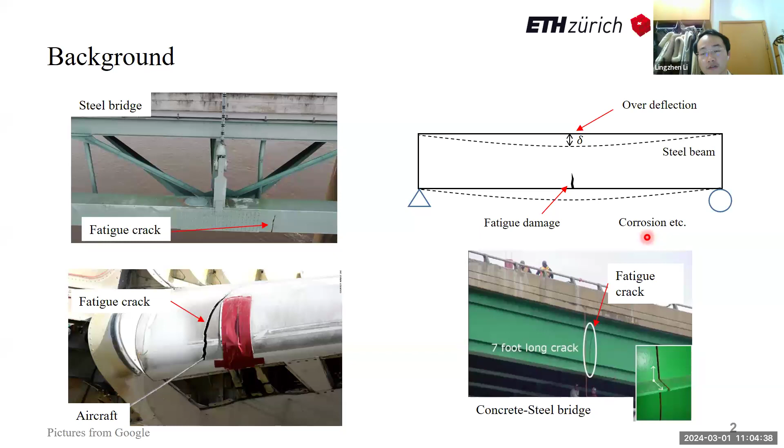The background of this PhD work is that metallic structures around the world, many of them are suffering from fatigue and fracture problems. Here are examples of civil structures, and here is another bridge. Not only in civil engineering, but also in the aviation field and associated fields, fatigue and fracture damage for metallic material is very common. Here is a schematic view of those typical damages. Fatigue damage, over-deflection, if combined with corrosion etc., the problems are even more severe.

What can we do with those problems? We have generally two sorts of solutions. The first is simply to replace the damaged structure member and put a new one there. The problem would be solved at the structure level and also the material level. However, such a solution has a very clear disadvantage. For example, for bridge structures, local traffic would be blocked, creating disadvantages for local society and economy.

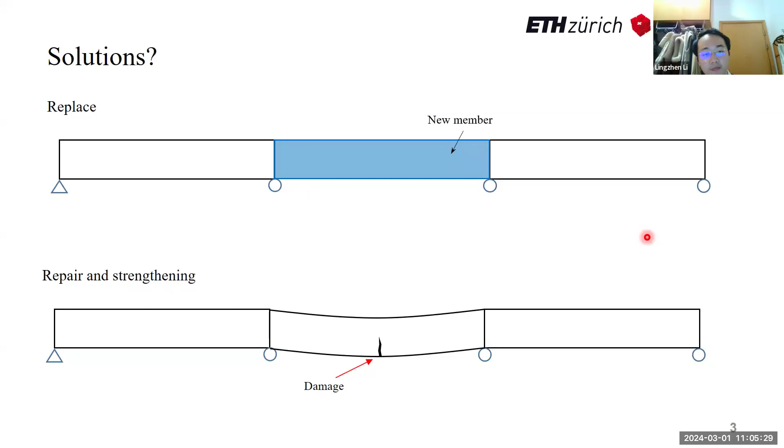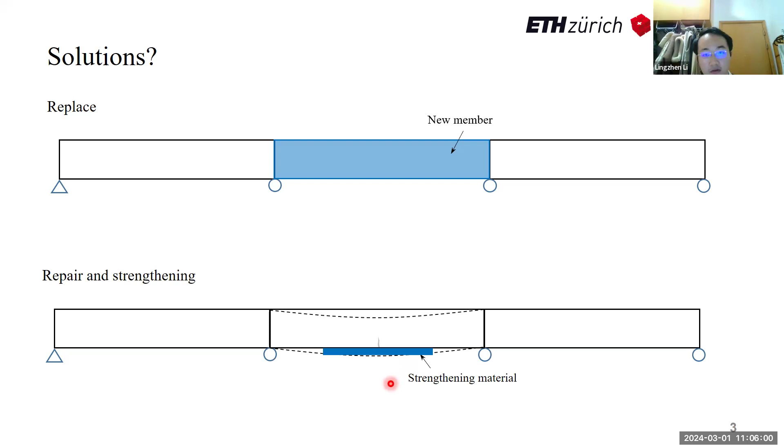Instead, we could leave the damaged structure member there, but do some strengthening or repair. The problem at the material level still exists, but at the structure level, we could solve the problem and make the structure runnable. There are a lot of techniques for structure repair and strengthening for not only steel structures, but also concrete structures, etc. In my PhD work, I used a material called iron-based shape memory alloy, for short Fe-SMA, for such bonded prestressed strengthening.

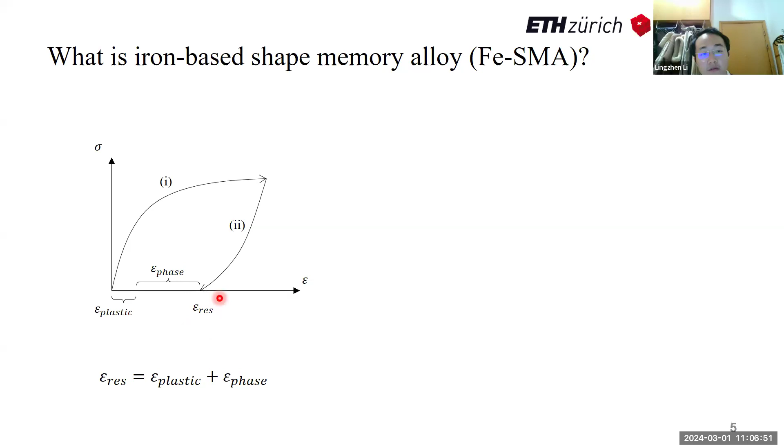First of all, what is this material? This figure shows a typical stress-strain behavior of iron-based shape memory alloy, Fe-SMA. After unloading, it features a typical residual strain, which comprises two terms. The first is a plastic strain. The second is a phase transformation strain. For traditional steel material like mild steel or high-strength steel, this is the end of the behavior. But for our shape memory alloy, this phase transformation strain can be fully recovered upon heating to a certain temperature. This phenomenon is called the shape memory effect, as if it remembers its original shape.

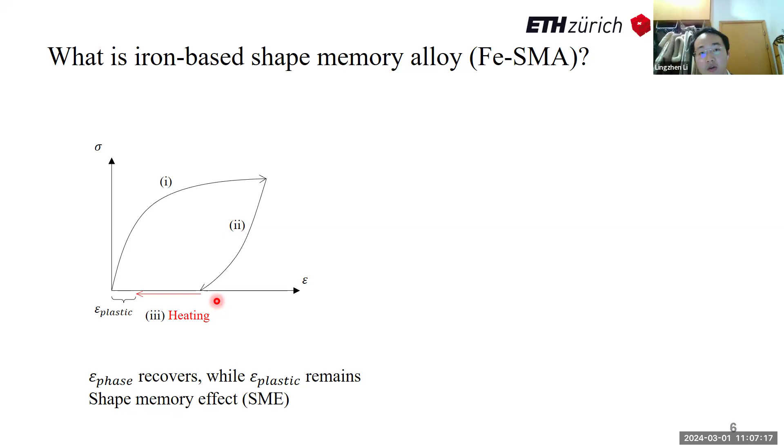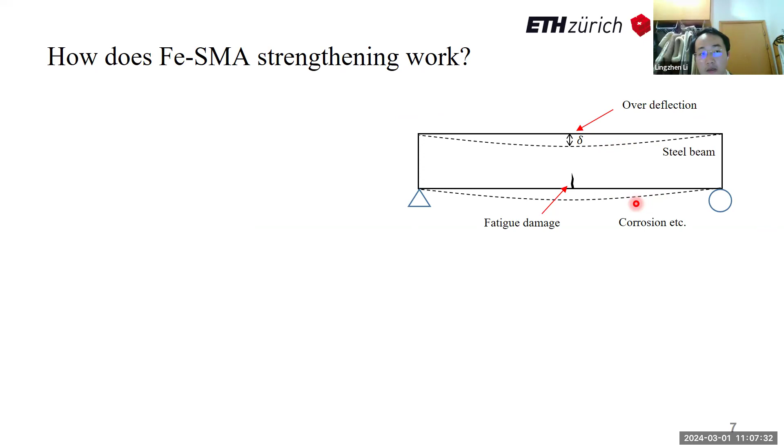We can use this special property of shrinking during heating for prestressed strengthening. Here is a schematic example. As we previously mentioned, for existing steel structures, problems would exist. But if we bond a pre-strained shape memory alloy, which is stress-free, to the target location and heat it, it tries to shrink, remembering the shape memory effect. However, the parent structure limits its deformation. Therefore, tension is generated in the shape memory alloy. To balance this tensile force, a compression is generated in the parent structure. This compression helps us close existing cracks in the existing structure. Not only can this technique improve fatigue and structural performance, but it can also do deformation control, etc.

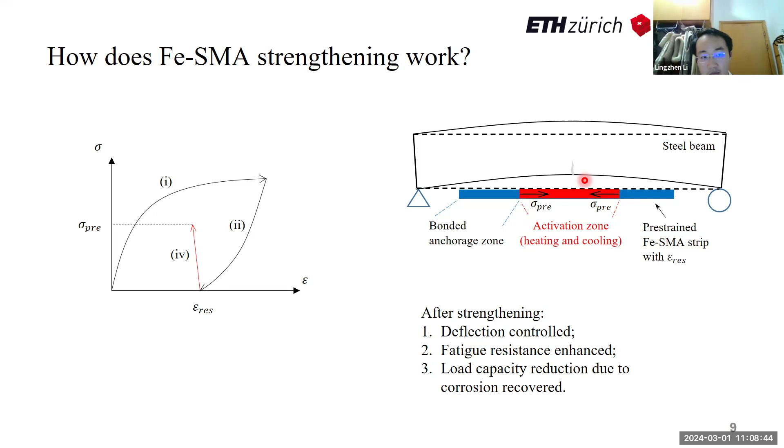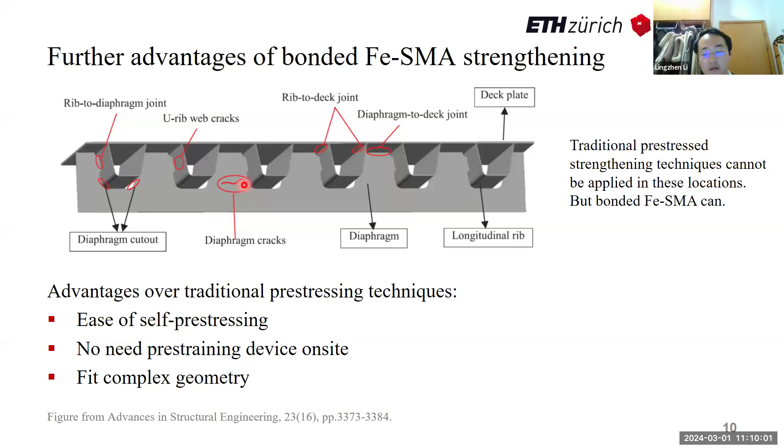Prior to my PhD work, the knowledge in this field was very lacking, and there was only one published work in this field. So my supervisor and I designed these objectives to understand this strengthening technique. First of all, we tried to understand the bond behavior in this bonded anchorage zone.

Excuse me, one very important concept I forgot to mention. Using this bonded Fe-SMA strengthening technique, we have a concept called partial heating activation. The idea is that we heat only the center part to generate prestress, and the remaining two ends remain unheated and transfer the prestress to the parent structure.

The first objective was to understand the bonded anchorage zone. We know that the adhesive bond has a strong temperature dependency, so the activation temperature might influence the bonding property between shape memory alloy and steel substrate. The second objective was to understand how the activation temperature would influence the bond behavior here.

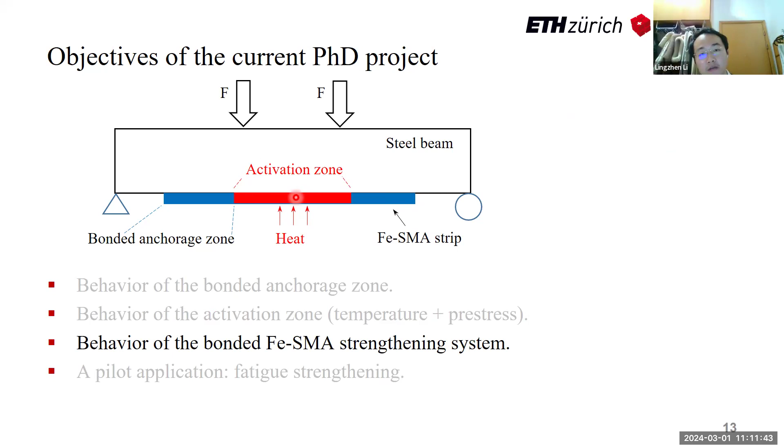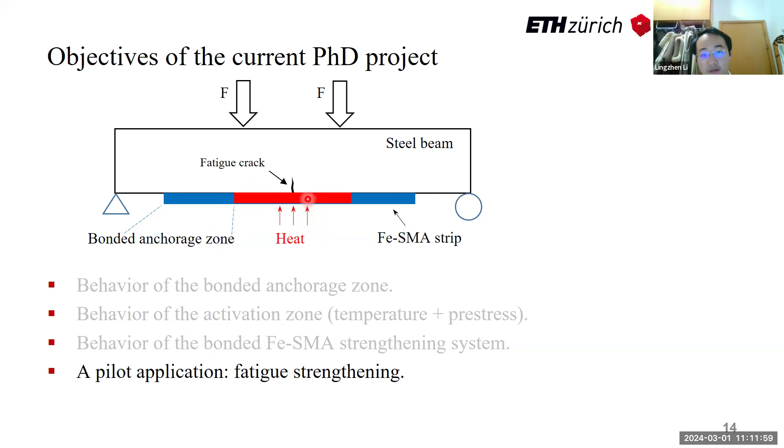Afterwards, we would have to understand the structural behavior after such a bonded prestressed strengthening. In the very end, I conducted a pilot application using this strengthening technique for fatigue strengthening of a steel plate with a central through-thickness crack.

Let's start from the first objective. Here is a typical lap shear sample of mine: a shape memory alloy strip bonded by a thin layer of adhesive to the top of a wide steel plate.

The general procedure was that first I used acetone to clean the bonding interface and bonding surface, then used sandblasting to remove the oxidized layer and create some roughness for better bonding property. Afterwards, acetone cleaning again, then applied adhesive, curing for two weeks or more.

Here I used two types of shape memory alloy. The blue one represents a prestrained shape memory alloy, the red one a non-prestrained one. They are stress-free when bonded. The difference is that even though they are the same material, they have different residual strain states, so in modeling they can be regarded as two different materials because they have different stress-strain behavior. I also used three types of adhesives, whose stress-strain behavior are shown here.

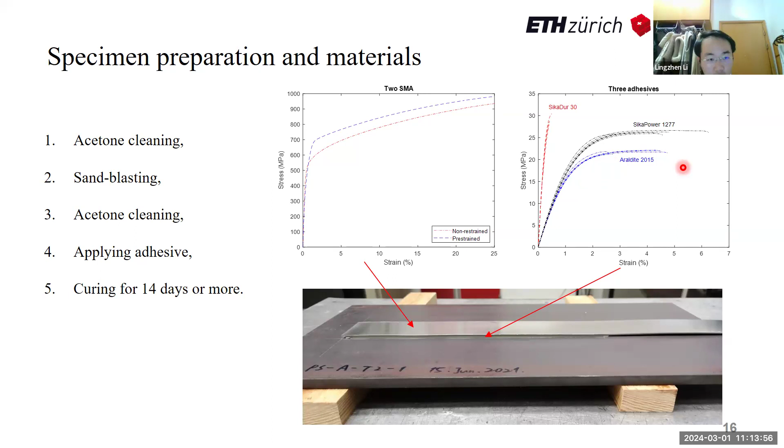After curing of this specimen, the steel plate was clamped here, and the extension side of the memory alloy was held by the mechanical clamp and tensioned by the hydraulic jack. During the test, I used an LVDT to measure the loading speed, and a computer controlled the loading speed so that the test could be conducted in a displacement-controlled manner.

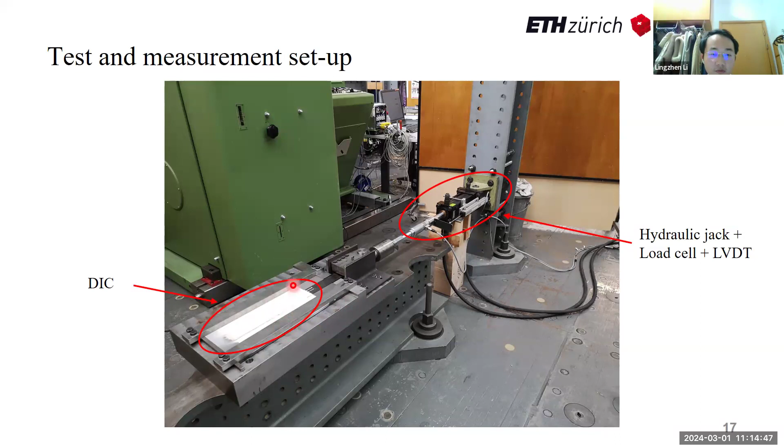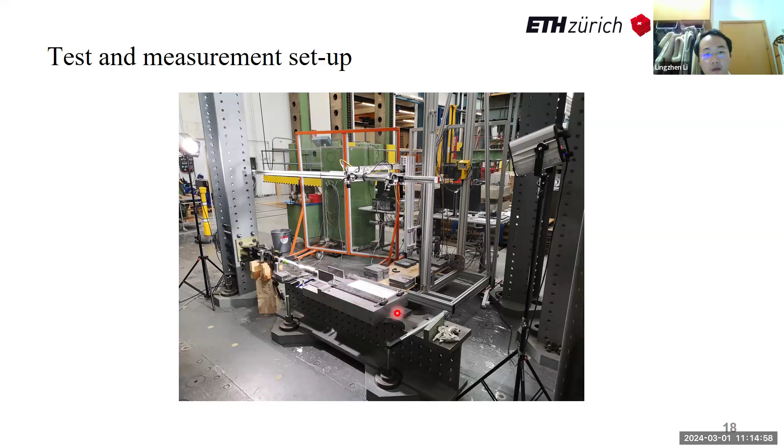The purpose was to allow for gradual debonding in the bond line, and we could analyze the gradual debonding behavior. During the test, I also prepared DIC black and white speckles, which are not shown here, and two DIC cameras were capturing pictures for later processing of the full field displacement and full field strain of my specimens.

Here is one typical two-dimensional strain contour. The contour wasn't straight, but curved. This means the strain state and the stress state in the shape memory alloy feature a typical membrane stress state. This brought some difficulty for us in analyzing the bond behavior hidden by the shape memory alloy.

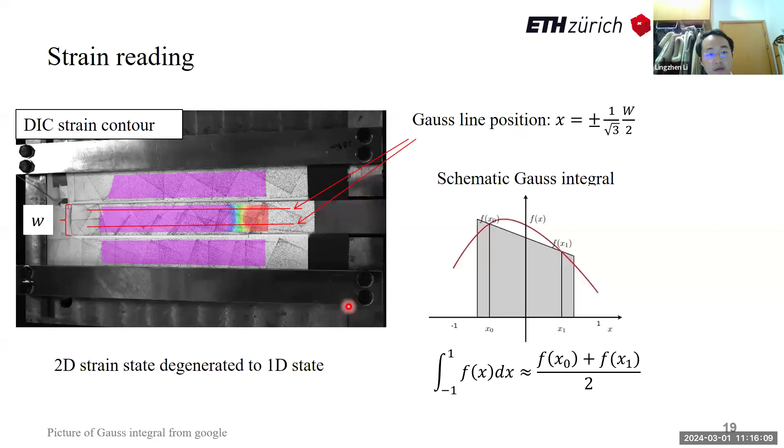So I used a technique called Gauss integral. The idea is that if these contours are an exact parabolic shape, then the strain values at these two Gauss points reflect the exact integral. If it doesn't follow an exact parabolic shape, this Gauss integral can still approximate the strain integral behavior very well, so that we could simplify the 2D strain problem to a 1D problem.

During the DIC measurement, we have the full field displacement measurement, which can be simplified to a one-dimensional displacement-location behavior. Integrated in the DIC software, we can analyze the strain-location behavior. Substituting the measured one-dimensional stress-strain behavior into this strain-location behavior, we obtain the simplified one-dimensional stress-location behavior. Further analyzing the equilibrium of the shape memory alloy infinitesimal element, we can obtain the shear stress-location behavior.

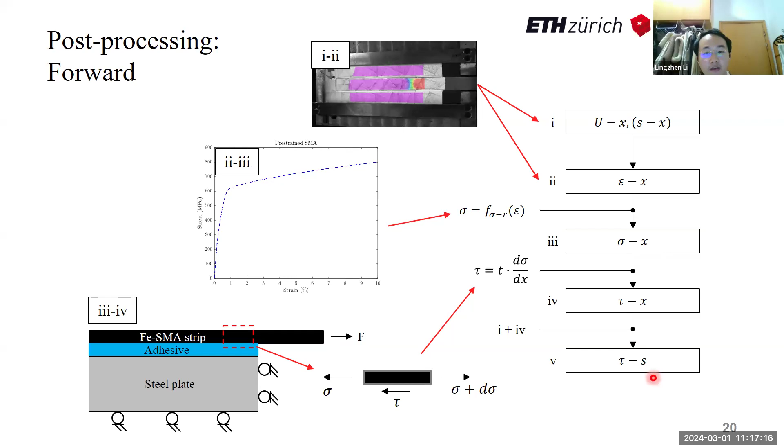The last step was to correlate the shear stress-location behavior with the shear slip-location behavior measured in the first step. We have the shear slip behavior of the bond line. This is an animation of the analyzed experimental behavior.

As the force increases, the tensile stress, tensile strain of the shape memory alloy, and also the shear stress in the adhesive bond, they increase. But once the force enters the plateau, the bond capacity is reached and damage happens in the adhesive line. Both the tensile stress profile, tensile strain profile, and shear stress profile didn't change shape, but propagated from the loaded end to the free end.

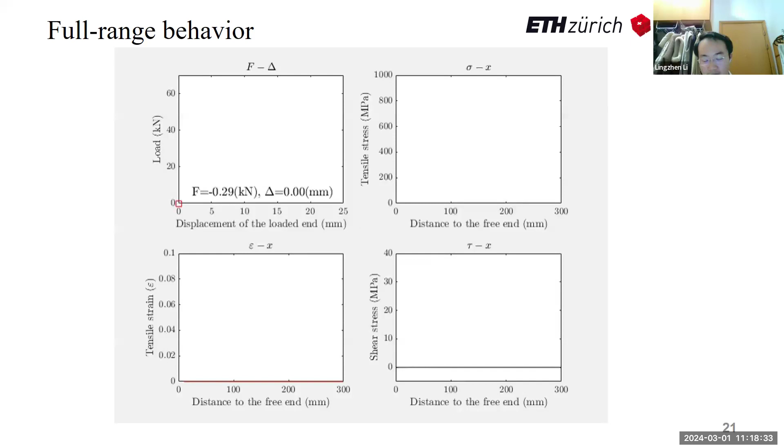This shows the full range behavior of one of my specimens. I in total conducted 24 such lap shear specimens with different memory alloy type and adhesive type, adhesive thickness, etc. I observed a very similar phenomenon and acquired a huge amount of data.

But we are engineers. We cannot say that for every strengthening project, we conduct a group of tests and use those measured experimental behaviors for our design of bonded strengthening. Therefore, we need a model to describe and predict the behavior in the bond line.

Prior to my PhD work, there was already a lot of behavior investigating the bond line and also this lap shear behavior, especially in the field of CFRP bonded, unbonded strengthening. But there is a major difference between my case and the previous cases. CFRP is typically known as a linear elastic material, but our shape memory alloy features a typical nonlinear stress-strain behavior, which brought some difficulties for applying the CFRP bonded model to my case.

Therefore, I built my own lap shear model. Here, I assumed a sufficiently long bond length so that the load at the right-hand side doesn't introduce any shear deformation and shear stress at the free end. Here is the boundary condition.

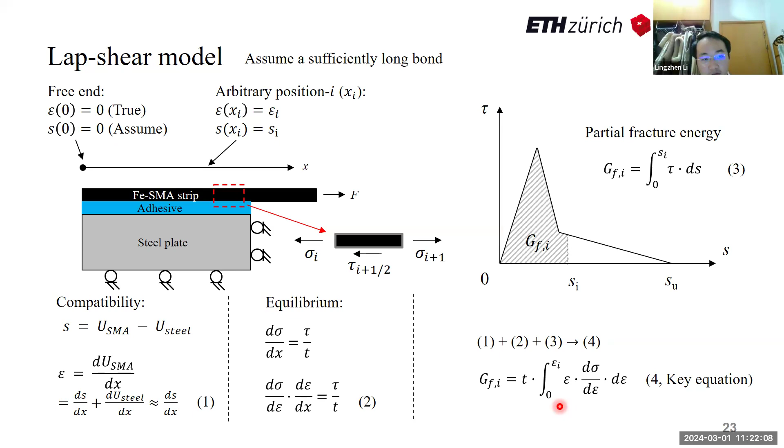Further deriving this model a bit, we would have several practical functions. Due to time limitation, I won't go deep into details, but show you some of the key results. The first function is a prediction of the bond capacity.

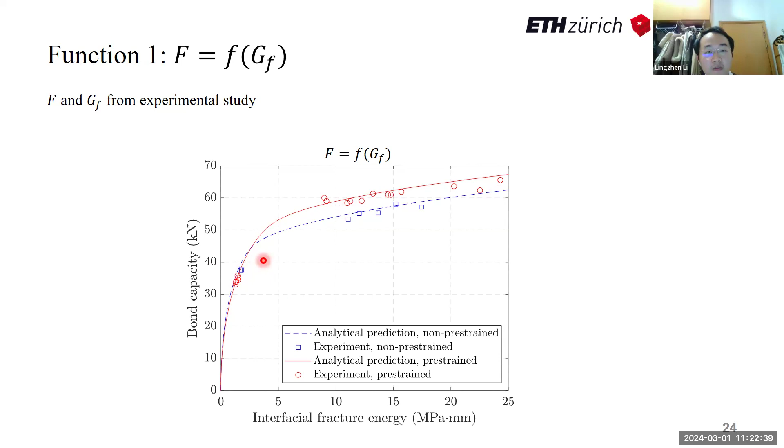The two curves are my model prediction. The solid red is the bonded joint with pre-strained SMA, the blue curve with non-pre-strained SMA. The dots are my experimentally measured results. We see that the experimental results are distributed around my model prediction.

The second function is we could analyze the bond slip behavior directly from the measured force-displacement behavior. Here I show you an example. During the lap shear test, we could measure the force-displacement behavior as shown in this red curve. Substitute this data into my model, and within one shot, we could obtain the local bond slip behavior shown as this red curve.

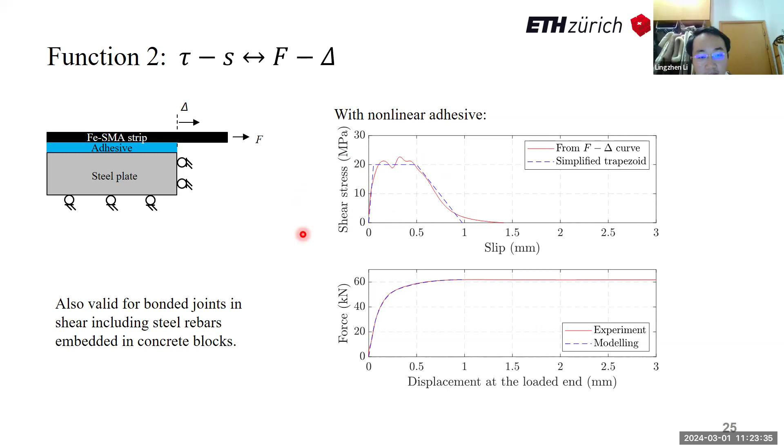Or the other way: if we already know the bond slip behavior in the bond line, we can simplify it to a specific shape for an easier analytical solution. Then substitute this simplified bond slip behavior into the inverse of my model. Within one shot again, we could analyze the force-displacement behavior.

If you're not so interested in the case of shape memory alloy bond, I would show you a further example of steel bonded to concrete. I used some experimental data from my colleague Bernhard Schranz at Empa.

Here is a schematic plot of shape memory alloy rebar embedded in concrete. In many of the standards around the world, like ASTM and also FIB — FIB means International Federation for Structural Concrete.

The typical methods to measure the bond behavior between steel and concrete use a short bond, typically 5 times the rebar diameter, and measure the force displacement behavior. Then the shear stress is calculated as tensile force divided by the rebar perimeter and the bond length, so that we could have this average bond slip behavior.

My colleague Bernhard Schranz measured 3 local average bond slip behaviors shown as the dashed blue curves. Then he measured the force displacement behavior of two joints with longer bond length, 800 millimeters long.

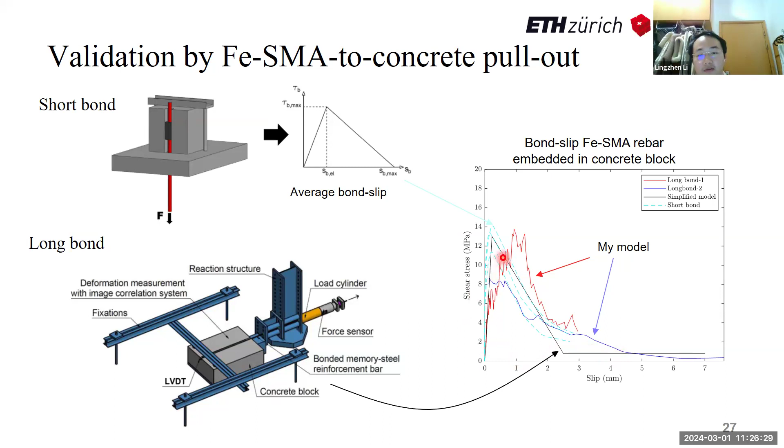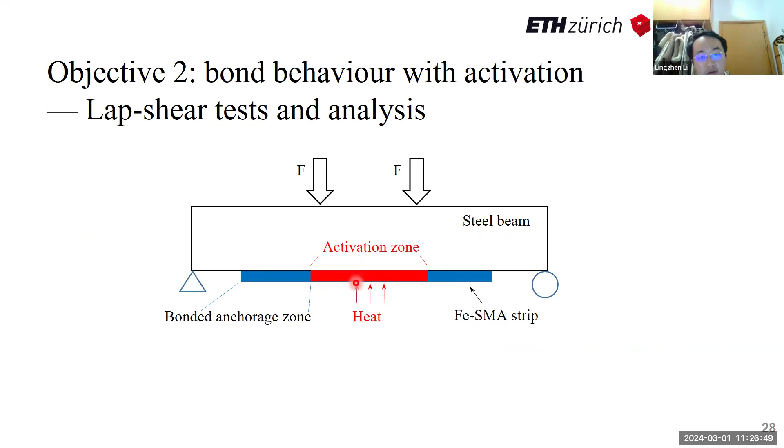So far we have gained some knowledge in the bonded anchorage zone. Then, what was the influence of the activation temperature and generated prestress on the adhesive bond?

I designed an activation setup based on this lap shear model with local activation. In this special setup, copper clamps allowed electricity to enter the shape memory alloy from this location, going through the shape memory alloy and out from this location. Only the center part of the shape memory alloy strip was heated and generated with prestress.

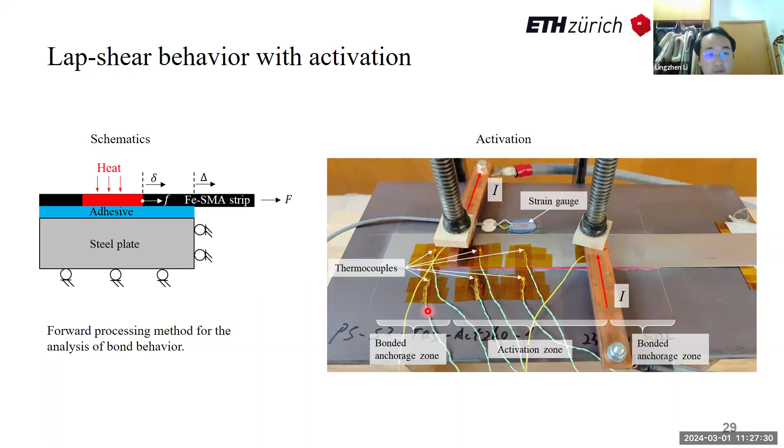After some analysis and post-processing, I found that for global force displacement behavior, for joints without activation or with temperature activation, their curves are very similar. Similarly, when I looked into the local bond slip behavior, I found those without activation or with heating activation behave very similarly.

This suggests that we could use the bond behavior or joint behavior without activation to represent those with activation. This would help us simplify the testing procedure and the analysis procedure.

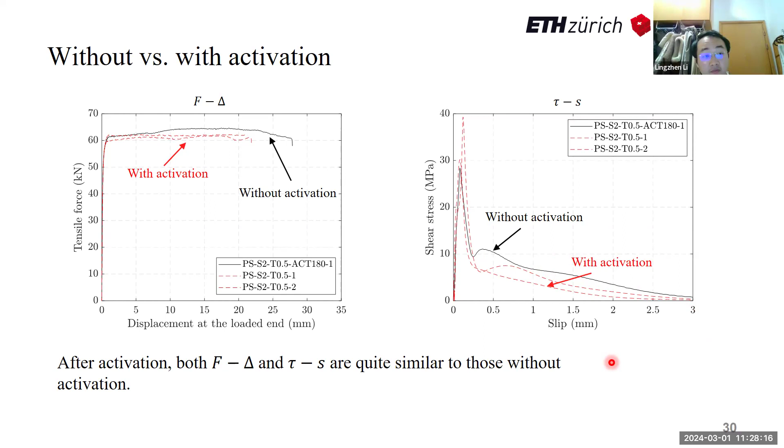But what's the reason behind this? Further analysis told me that the fracture energy in the bond line was really influenced by the activation temperature. First it increased, but after a certain threshold it decreased, meaning there was some heating damage in the adhesive bond.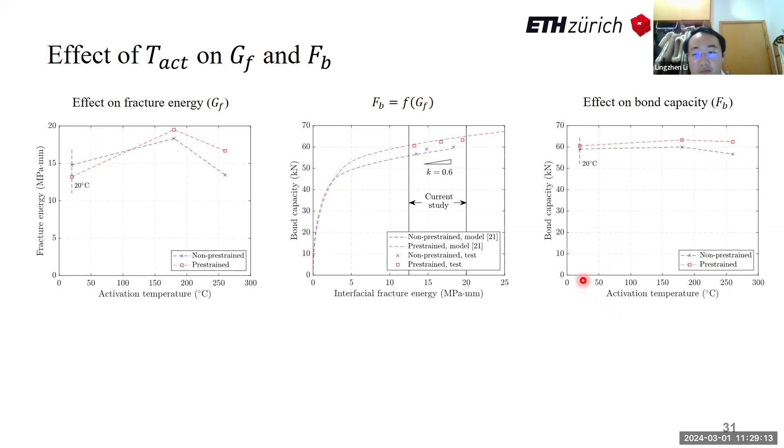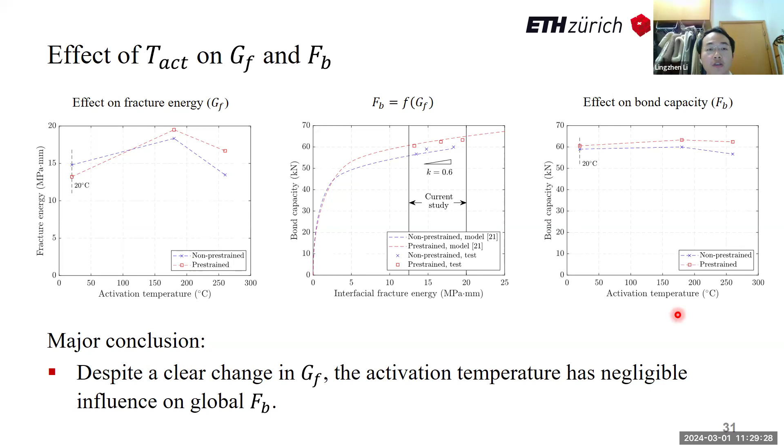However, if you remember my model prediction for the bond capacity, at the range of the used interfacial fracture energy, the bond capacity is not sensitive to the change of the fracture energy. As a result, we observed that the bond capacity is nearly constant over the range of activation temperature, from room temperature to 260 degrees C. This further suggests that for joints with temperature activation, we could use the joint force displacement behavior of joints without activation.

Now we've gained some knowledge in the bonded anchorage zone, also some behavior in the activation zone. It's time for us to jump out and analyze the structure member strengthened by this bonded shape memory alloy strengthening technique.

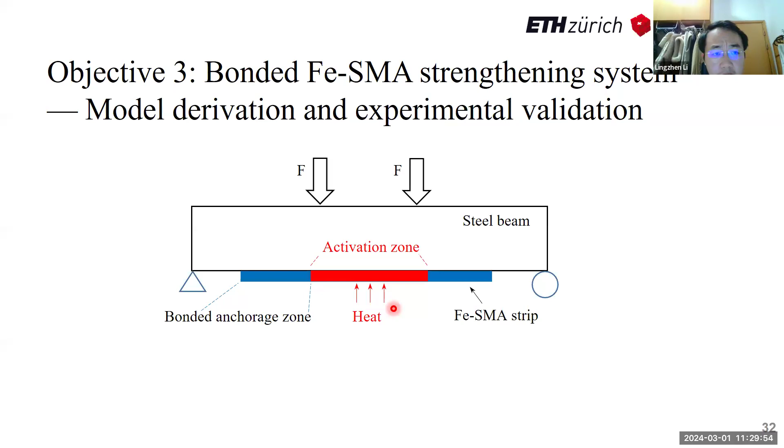After we bond the prestrained shape memory alloy strip, we add some additional stiffness to the structure member. This is called passive strengthening, whose effect is limited. But after generating prestress, the strengthening is more efficient.

In the model analysis, I had two basic assumptions. The first is that in the activation zone, the adhesive was fully soft during activation because the activation temperature was as high as 180 or 260 degrees C. At this temperature, most of the adhesive loses its loading stiffness. The second assumption was that in the bonded anchorage zone, the adhesive bond was not influenced by the activation temperature at all.

But in reality, there is a short distance which allows the activation temperature to reduce to room temperature. I observed this during the activation test, but in the simulation I ignored such a small zone.

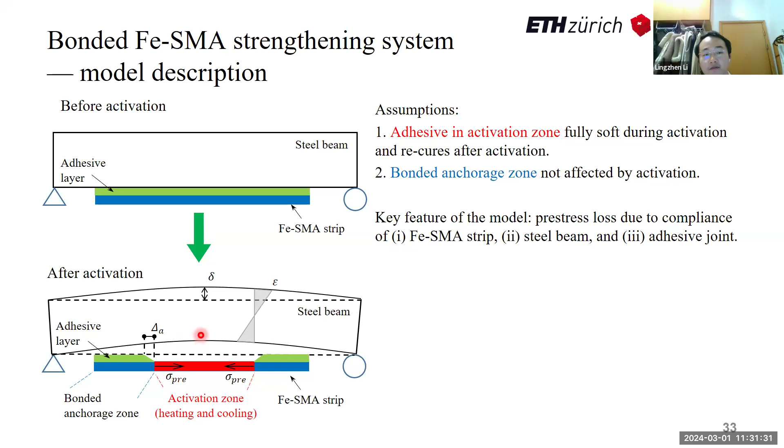Further in the analysis, I considered the generated prestress, the shear deformation of the adhesive bond, and the compressive bending deformation of the substrate. In the end, the model could successfully predict the strain of the substrate caused by the generated prestress, also the deflection of the substrate. These two figures show the modeling results versus experimental measurement.

Even though this model was derived based on strengthening for steel structures, I also tried validation on strengthened glass structures and strengthened concrete structures.

Most of the data showed support for the derived model apart from these two dots. I have to say that these two gray dots with the huge error contain some deficient experimental design in my cases. But the rest of the dots, nearly 20 dots, supported the accuracy and efficiency of the model prediction.

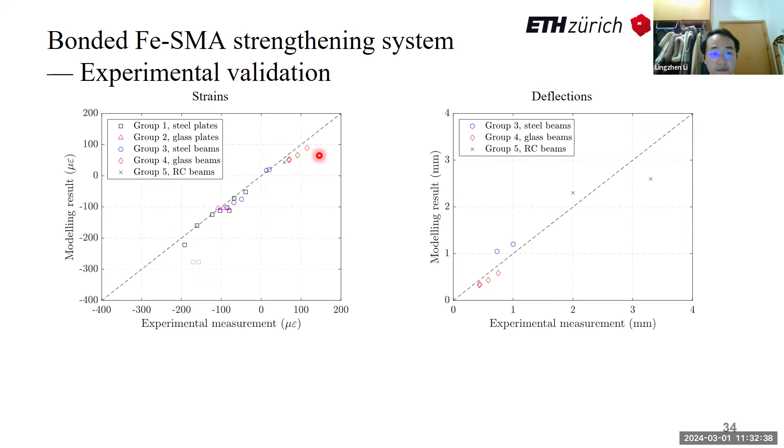We are, structures after strengthening have to be subjected to some load. Example, bridges subjected to traffic load and some towers subjected to wind load. Therefore, after strengthening, analysis of the applied pre-stress etc. is not the end. Therefore I conducted some tests at the lab level. I call it a pilot strengthening project, fatigue strengthening using bonded Fe-SMA strips.

Here is a steel plate with a central through thickness crack, which is hidden by this crack opening gauge. I used 4 shape memory alloy strips for strengthening of each steel plate, 2 on the front side, 2 at the back side. At the center region, memory alloy strips were heated to generate pre-stress, and 2 bonded anchorage zones remain unheated and transfer the pre-stress to the substrate.

Here is at the end of fatigue test. The steel plate was fully cracked. A crack went through the cross section here, but we see that 4 Fe-SMA strips remain holding substantial tensile force and linking the cracked 2 parts of steel plate.

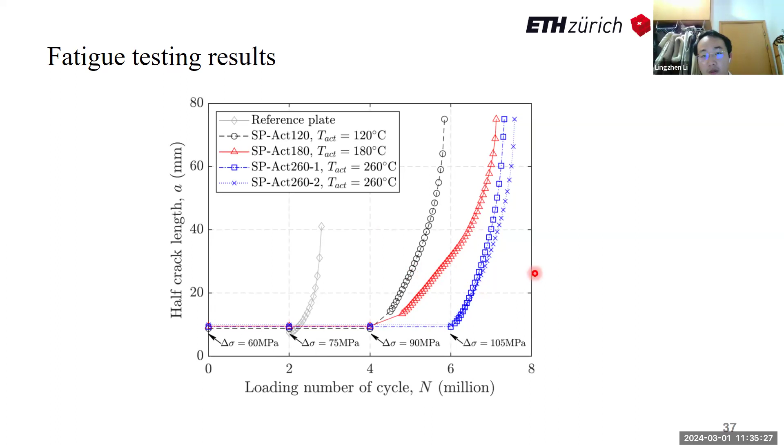Through the test, we found that a higher activation temperature has better strengthening efficiency. This not only the test result supported, told us that higher activation temperature brought a better strengthening efficacy, but also a pre-stress analysis model, shown in the previous slide, plus a fatigue analysis model, they are able to predict whether a fatigue crack here will propagate at a certain level.

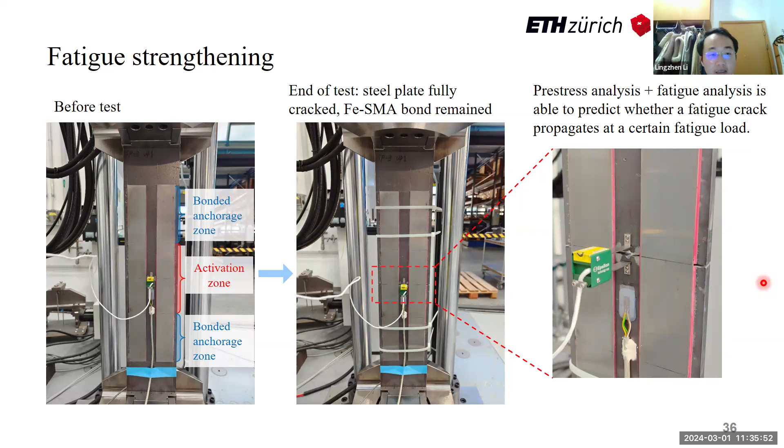These two models combined could be used for fatigue strengthening of existing structures using our bonded strengthening Fe-SMA technique. So here comes to the major conclusions. In this PhD work, I conducted a systematic investigation on shape memory alloy to steel bond behavior from the material level to component level, which means bonded joint, to finally the structural level.

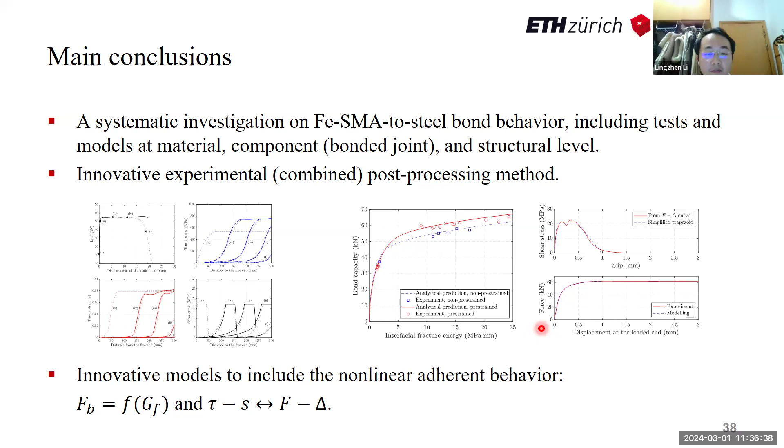They include the tests and the models. I used innovative post-processing technique to analyze the experimental lap shear behavior. I developed innovative analytical models to predict bond capacity and also to analyze the bond slip behavior directly from the measured force displacement behavior. Afterwards, I analyzed the bond behavior after activation and found it can be replaced by bond behavior without activation, even though in the very local mechanical level, there is some difference. But for engineering application, the global force displacement behavior, etc., the difference is negligible.

In the end, I proposed a model and conducted tests to analyze the strengthening, the efficacy of the strengthening system. This model can predict the pre-stress level accurately in terms of the compressive stress induced in the parent structure as well as the deformation of a substrate structure.

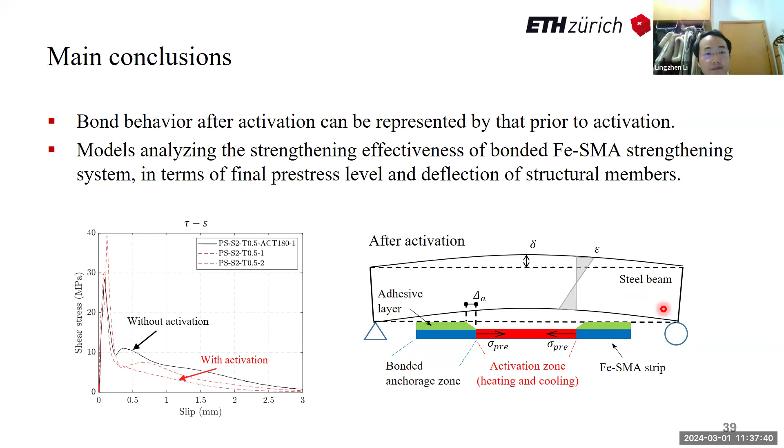Here, I guess I have a few more minutes, right? Hello? Absolutely. Oh, okay, thank you.